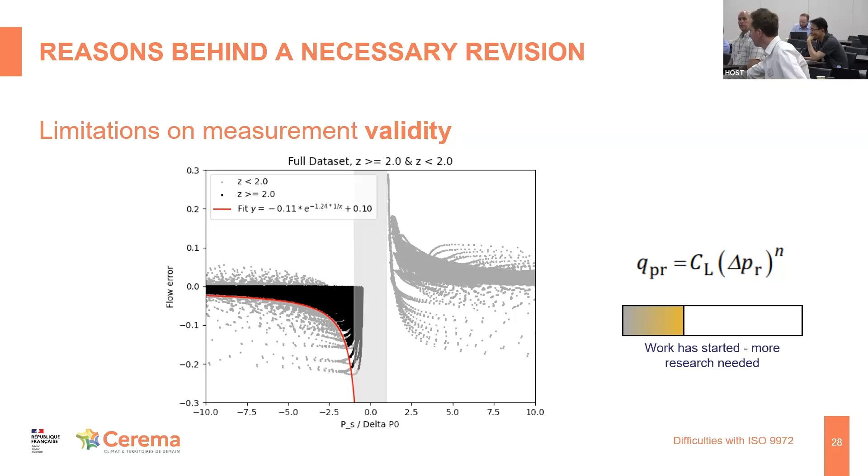The last speaker for the morning session is Valérie, and she will talk about the durability of building airtightness.

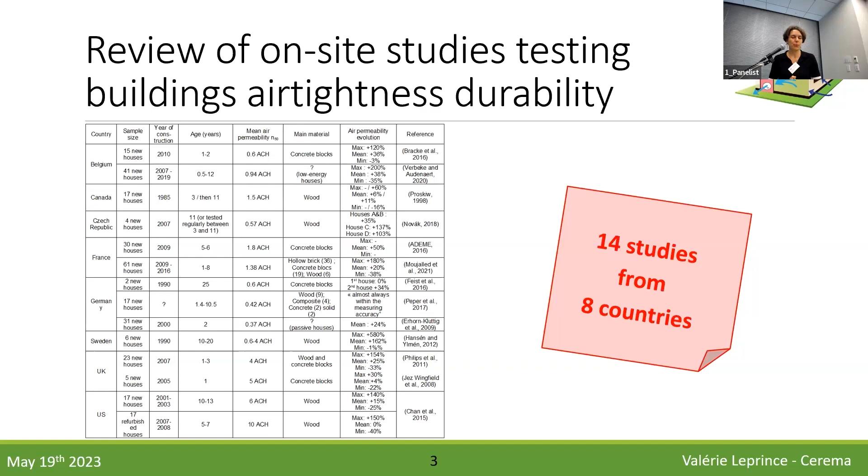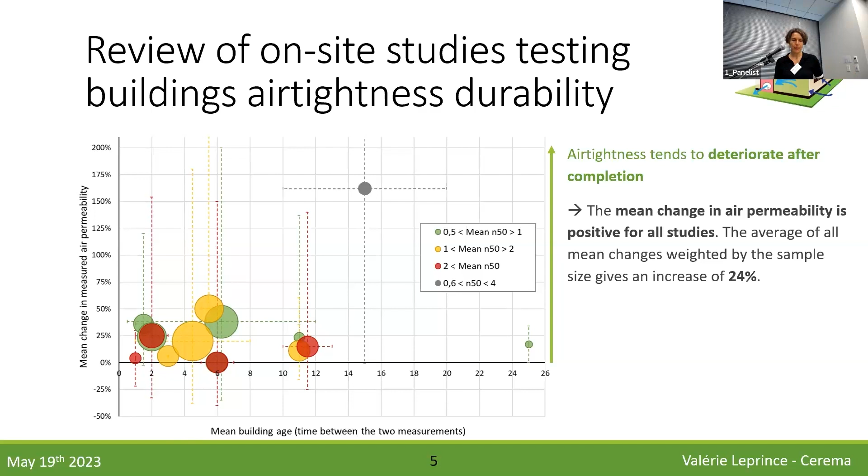For each study, as I mentioned at the beginning, there are always houses that have improved and houses where airtightness has deteriorated over the years, up to 580% for one study - that means multiplied by 6, which is quite a lot. For improving cases, one study showed almost 40% improvement.

So we need to explain that - why in some cases it deteriorates, and why in some cases it's improving.

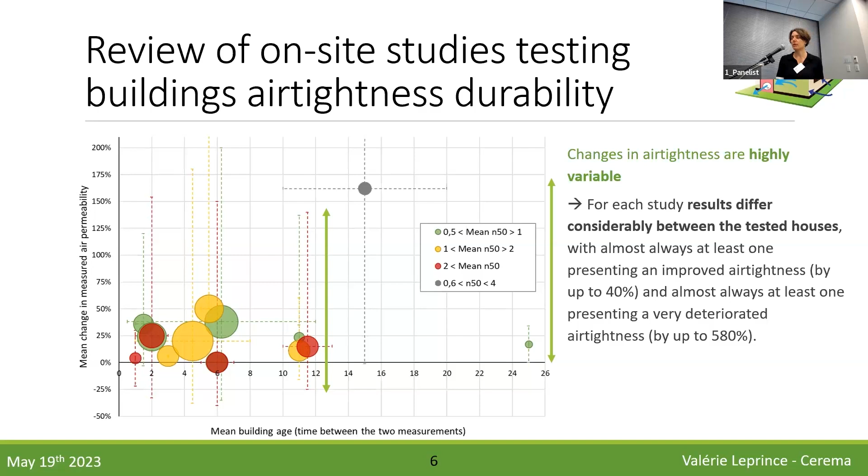What's very interesting here is that there's no correlation between the age of the building and the deterioration. This means that even if you do your durability test after 2 years, you will find this 25% deterioration. What does that mean? It means that it changes at the beginning and then tends to stabilize - everything seems to happen in the first 2 years.

This has been confirmed with buildings that have been studied regularly. For example, in this study, we tested the building at commissioning, after 1 year, after 2 years, and after 3 years. We found a big difference between commissioning and after 1 year, but it remained stable after 2 and 3 years. So the same building tested 4 times showed a big difference after 1 year, but no longer changed in the following years.

We also looked at what changed in percentage terms. You would expect that a tighter building would show more change in percentage over the years, because the same size of leak would impact a tighter building more than a non-tight building. But we see that tight buildings actually deteriorate less in absolute value at the beginning than non-tight buildings. We have roughly the same percentage of deterioration for the green bubble and the red bubble on average.

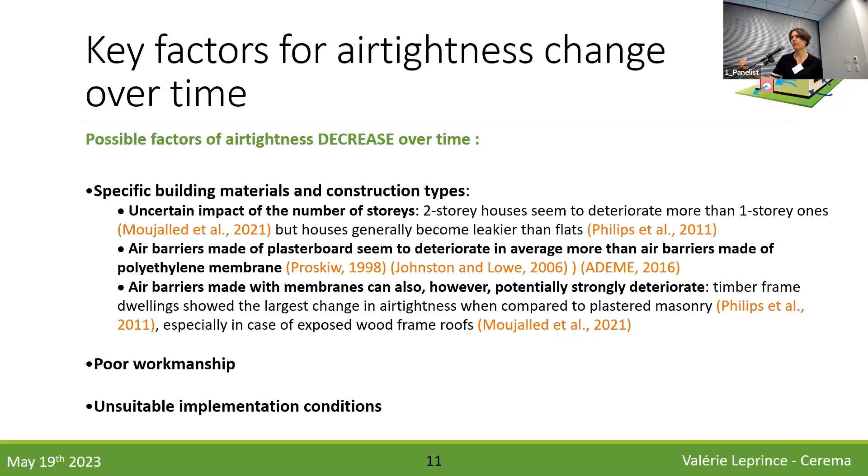Because with all mastics and all airtightness products, there is a temperature and humidity level on which you can use it. But during construction, people do not care if it's -5 degrees at the moment of implementation. They implement it even if it's -5, while the mastic cannot be used below 10 degrees, for example. So this is something that needs further implementation also.

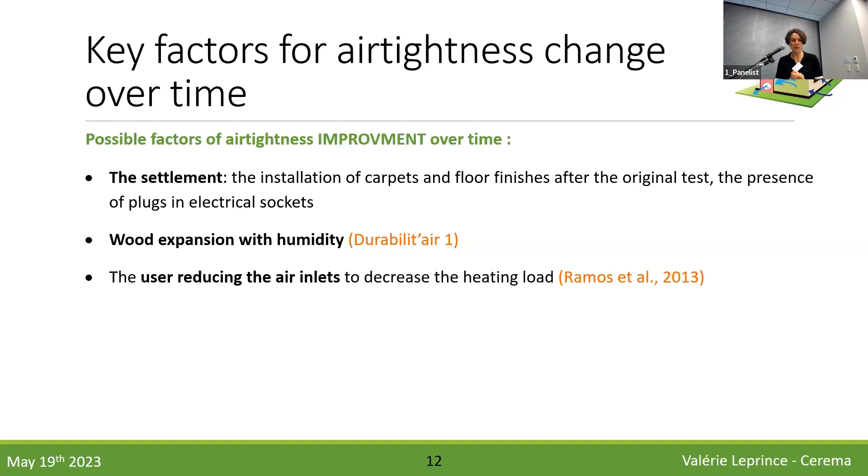What could explain the improvement? The settlement can also explain part of the improvement, and also the installation of carpet and floor finishes after the original test. Sometimes they test while the floor has not yet finished, and improving that may improve their tightness. Also, simply plugging in the electrical sockets can improve the airtightness a little bit. Wood expansion with humidity is one explanation, and also the impact of the user.

Another important thing to take into account is what is due to durability and what is due to uncertainty in the airtightness test. Of course, when we see this evolution, on average plus 24%, everything cannot be put on the uncertainty of the airtightness test. But it's very important to make sure that what we are observing is the durability in this kind of study and not a problem of airtightness test uncertainty.

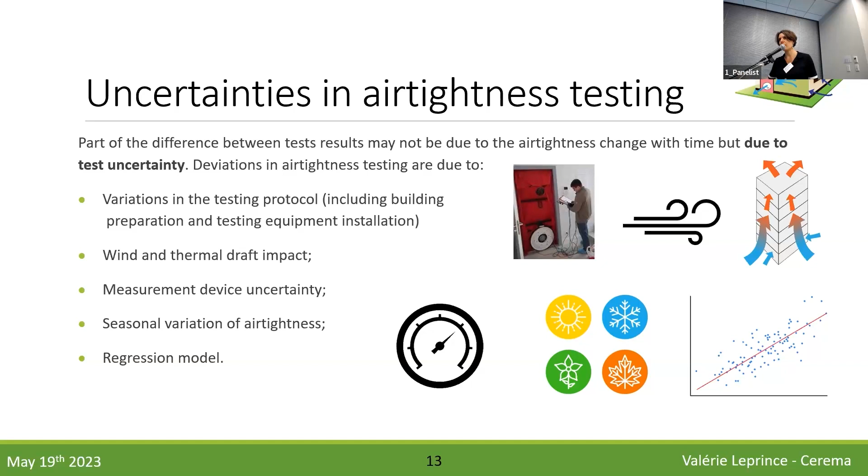So for example, in the study we have done in the Durabilit'air project, we made sure we were using the same measurement device, the same operator, and we were taking pictures of everything prepared in the building to do exactly the same thing year after year, and make sure this was not the reason of the evolution we observed.

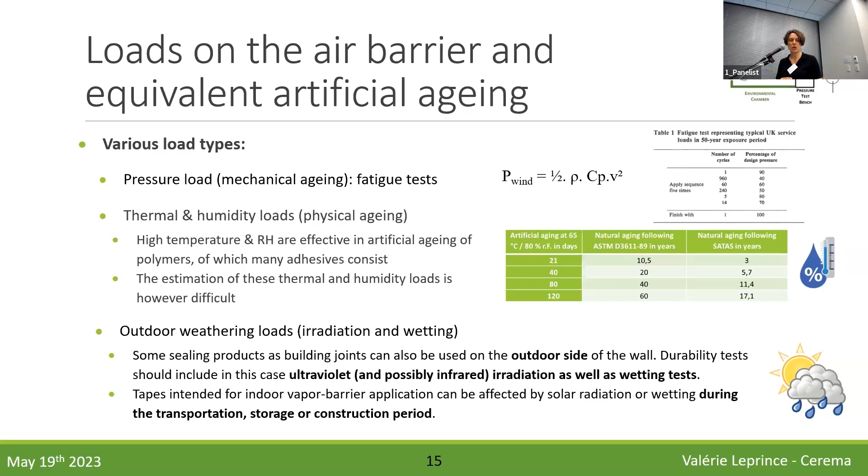Now the second part of the study was dedicated to evaluating what has been done in terms of controlled environment in laboratory to test the durability of the product. The problem is the product is under various kinds of loads: mechanical loads that will push, press and depress the air barrier, thermal and humidity load, and in some cases weathering load such as irradiation or wetting.

So we need to find out what needs to be reproduced on the air barrier to evaluate its durability. Certain studies from 8 countries have been studied here in this paper, and the main conclusion was we need a standard to do this test, because those tests are not comparable between each other, actually, since they were doing totally different things on the air barrier.

Another conclusion was it is not possible to reproduce in laboratory the equivalent of, for example, 50 years of aging. We cannot do that because we've got multiple products with multiple kinds of plastics and so on, and they won't age the same way. So for one product with one material, you can age it and say okay, it's equivalent to 50 years, but for an assembly of products, it's much, much more difficult.

The other thing is we definitely need, if we are to set a protocol here, to test the airtightness of the assembly and not the ability in terms of shearing and peeling of the products. We found that some adhesives were very, very resistant, impossible to shear and peel after a long time, but they became no longer airtight because very small paths of air were appearing after some years.

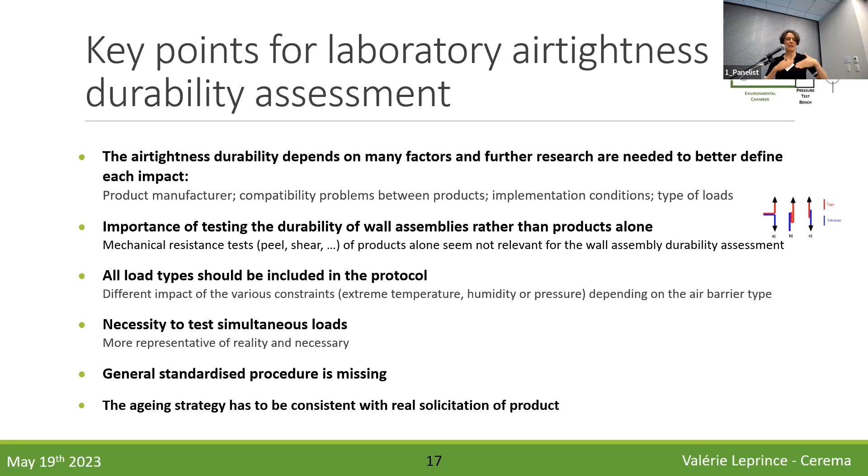And then implementation conditions impact, as I told you, are probably the reason why there is such a lot of difference between projects. What we assume now is that it depends on how the air barrier has been implemented and what were the temperature, dust, and humidity conditions when the air barrier has been implemented. So there are studies showing that even when you are doing exactly the same thing, you still have differences in the end in terms of value of airtightness.

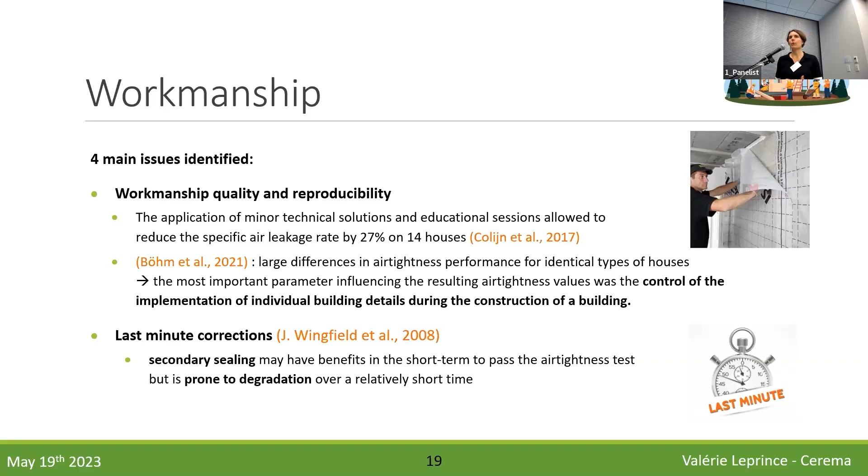There is a study from the UK showing that for buildings that try to pass the test at the last minute with mastic, they get 0.65 instead of 0.60. So quickly, they apply mastic at the last minute to try to save it and reach 0.6. Those last minute corrections seem to be less durable than the initial implementation.

The most interesting study I wanted to talk about is this study in Sweden, where they have 3 manufacturers and they tried to implement the products in ideal conditions, in dusty conditions, and in cold and humid environments, to see the impact of the implementation conditions on aging and on initial airtightness. Then they applied their own protocol for artificially aging the products on a large test wall, about 3 meters by 3 meters, in Borås, Sweden.

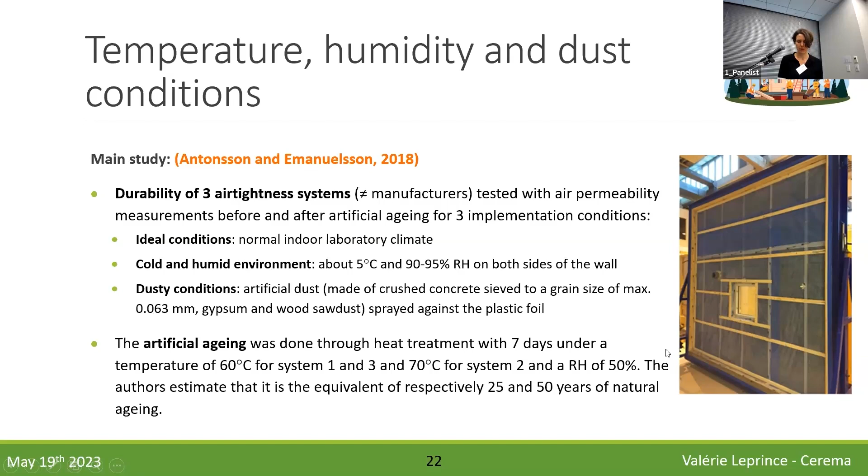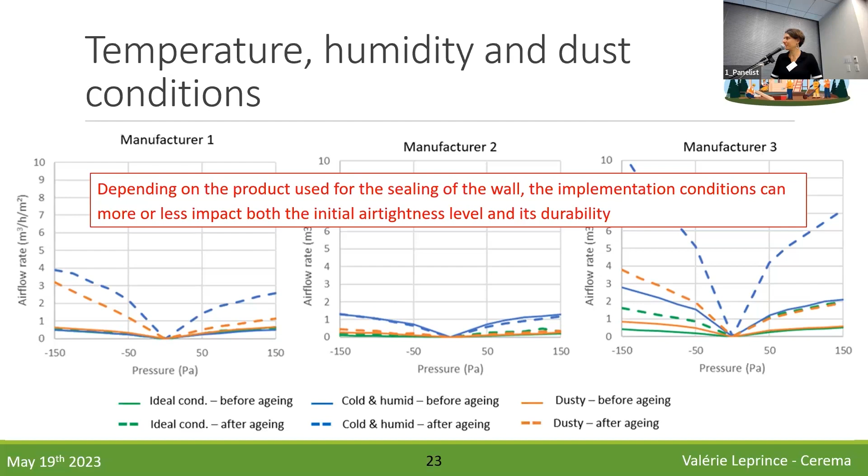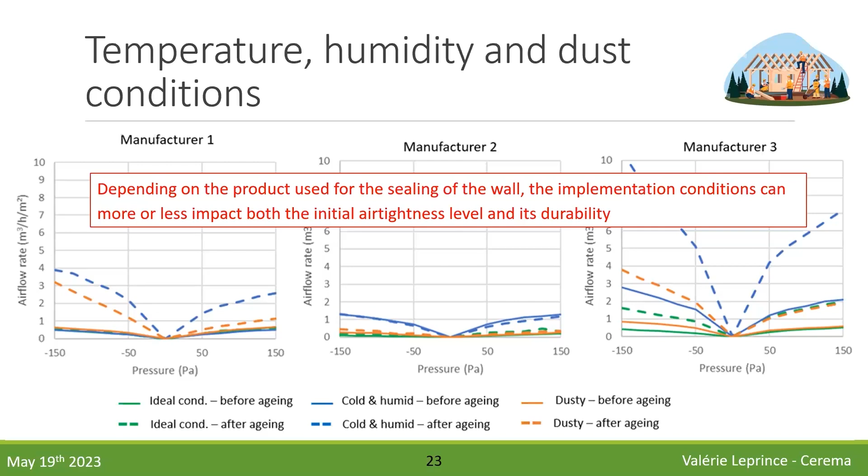Thank you very much. I have experience measuring the airtightness of buildings through the year, over 1 year. In Japan, in summertime the relative humidity is higher, so airtightness becomes higher, and in winter it's very dry, so airtightness is not good, it's loose. So do you have any information depending on the humidity?

Yes, indeed, we have studied seasonal variation of airtightness. In the first durability project, we gathered a lot of information from Japan, from Sweden, from France also. We made some measurements about the seasonal variation. What we found out is that if your construction is a wood construction without a plastic foil, without a polyethylene barrier layer, then indeed it will change, because the wood will expand and retract with humidity, so we will see those seasonal variations. But if you've got a concrete house, or a wood house with a polyethylene barrier, then it has no impact.

On all the measurements we have done, we have seen absolutely no difference between summer and winter. We have a huge database of 500,000 data in France, and we have plotted the average air tightness per month of measurement to see if we were seeing this tendency, because if there were a difference between air tightness between winter and summer, we should see this on the database. And it's perfectly flat. So on the way we built in France and in Europe in general, this is not observed in new buildings.

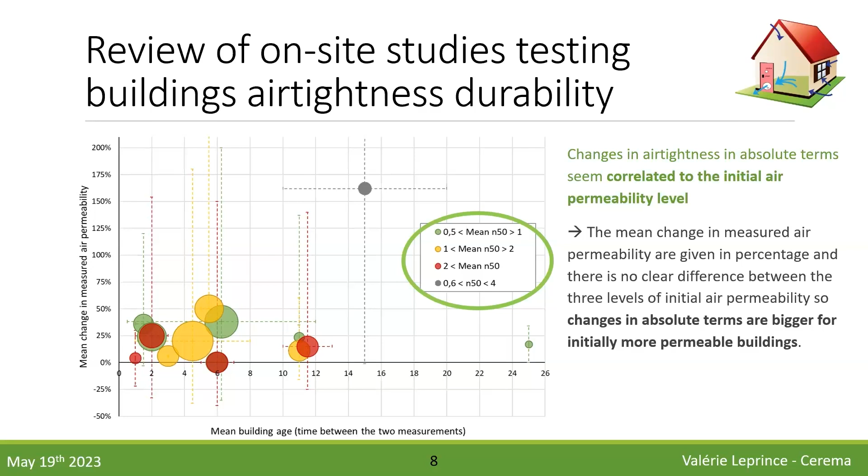I have a question. So would you recommend having a standard or requirement to do the air tightness test for the building, say every couple of years? As we can see the air tightness, there is some deterioration. Do you recommend that?

I definitely recommend doing the test every year or so, but this is quite impossible to impose. I mean, already imposing the test at commissioning was a challenge. Imposing a test for every owner every few years is, I think, almost impossible. But that would be great. And even when you sell a house, it would be good that the following owner be informed of the level of air tightness of the house that he will buy. Maybe we'll come to that, but it still needs a few years, I think.

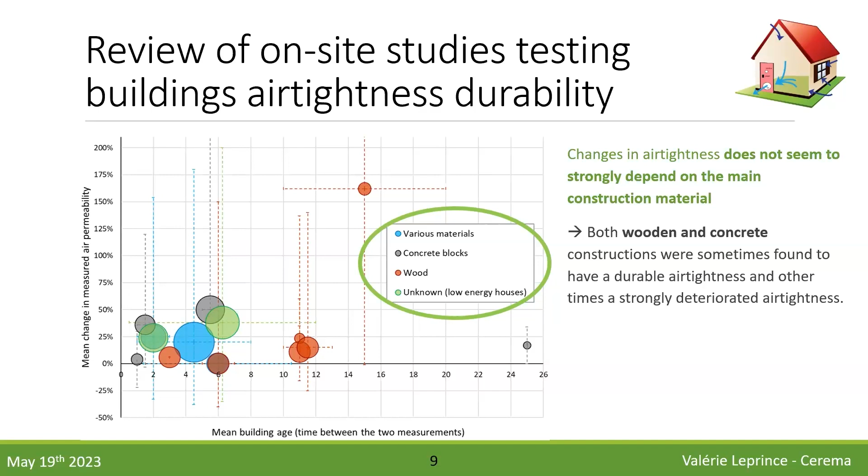So in that case, maybe use some materials to overcome the deterioration of the air tightness. Yeah, but we don't know what is the reason for the deterioration right now. We assume, following this Swedish study, we have great hope that we will explain a lot of things with implementation conditions, but we're not sure of that.

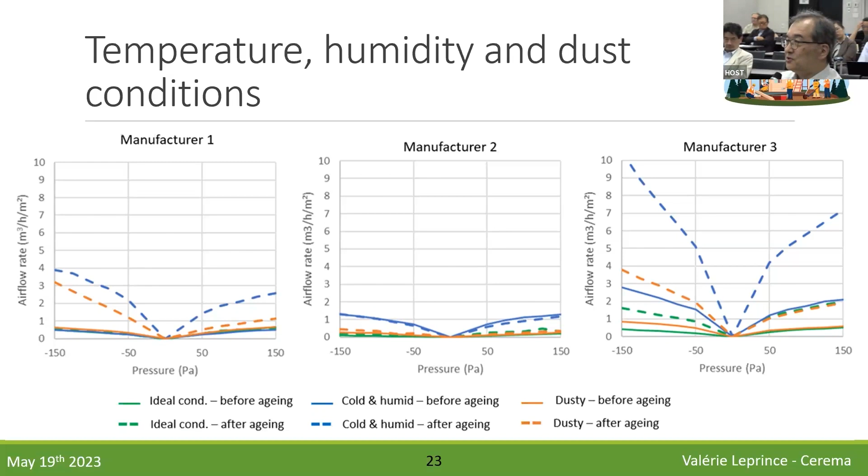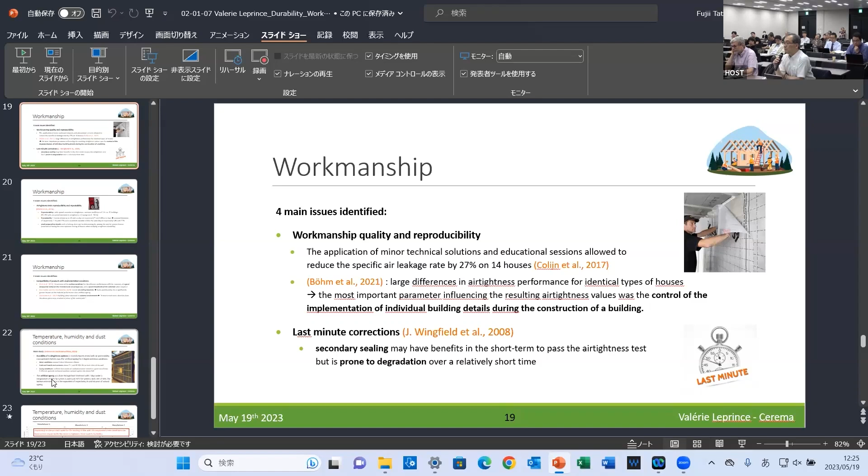That may not be what I mentioned. Sorry, I cannot see your point. Please repeat. My point is, in Japan at this moment, it's no longer required to do the air tightness test if you use similar construction method, similar material, and the air tightness wouldn't change too much. I didn't say so.

But even though there is no compulsory requirement for buildings in Japan, I am sure air tightness is very important. And there must be guidelines for builders, especially builders for detached houses, to improve the air tightness of their product, I'm sure. But yeah, again, I'm very interested in the air tightness of non-residential buildings. And I have a question for Valérie, if it is acceptable.

If it is a very high-rise building, the building itself can move due to wind pressure, and sometimes, such as in Japan, there is an earthquake. So I'm afraid that the air tightness of that kind of large building can change due to that kind of effect, but I don't have any information. So if you have any information or any guess you can make, could you please share with us?

Okay, I will go with a guess then, because maybe I will come back in 10 years and we'll have this information. For high-rise buildings, we are already trying to measure it, and for houses we are able to test the durability, but the durability of high-rise is yet a subject for a few years, I think. This is worse indeed in high-rise buildings, where there is settlement and more movement and so on, probably. But I have absolutely no value, no studies that I am aware of on the durability of air tightness of high-rise buildings. We have seen what work it was to measure a high-rise building - they don't want to do that within 2 years.

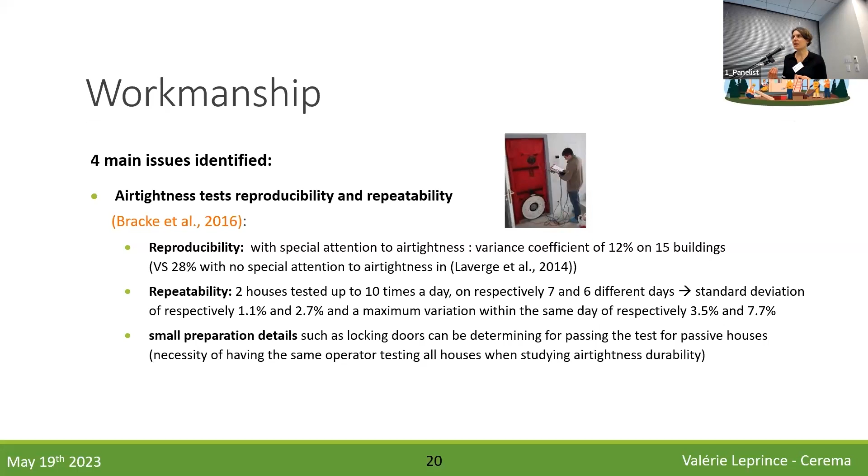But there is no study I am aware of. The uncertainty of the measurement is such that it would be difficult to decide whether it's durability or uncertainty in measurements. To study durability, you need plenty of data, because as I showed at the beginning, if you just look at one building, maybe it will have improved, maybe not, so just one building doesn't mean anything. What means something is a general average to evaluate if it will deteriorate more or less than other buildings. So make 100 tests of high-rise buildings, and then we will check.

Thank you. Any other questions?

I forgot to mention that the 2-floor houses were deteriorating more than the 1-floor houses. So probably if you get to 20-floor houses, it would be even more, but this is extrapolating.

Arnold has a question, I think. Yeah.

Maybe rather an open question about which way to go to improve airtightness of non-residential buildings and increase testing there. In your previous presentation, you showed that although in residential buildings in many countries we see a large share of houses being tested, that's not the case for non-residential buildings. And I'm wondering why this is the case, because for instance in Belgium we have the same methodology for residential buildings and non-residential buildings.